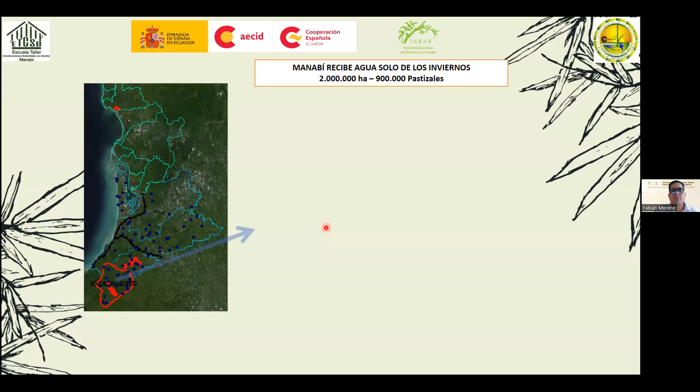People can save up to $320 a year because of self-consumption of bamboo. Here we can see some other pictures, also from Manabí.

They showcase that this is a widely deforested province, the second most deforested province in the country. There's almost 2 million hectares, out of which 900,000 are pastures. So all these dry areas are pastures, and those red spots are the bamboo spots.

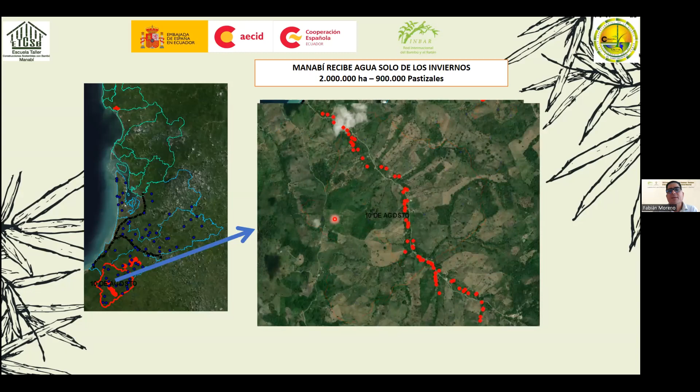So those lines are Guadua, and they protect water sources. If we look at the picture of the higher part of Manabí, we can see that bamboo is located in the highest points, and this is related to the conservancy of water. The majority of the bamboo found in Manabí is present because it helps us keep water.

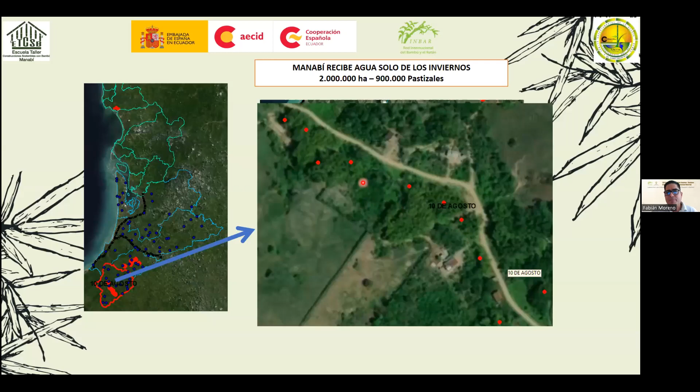Manabí is the only province that doesn't get water from... I think the survival, or water for human consumption, in this province depends on the amount of rainfall and the capacity that our forests may have to conserve water. That's why we see the presence of bamboo.

Whenever we look at the major uses of Manabí bamboo, we have this kind of cane called caña rolliza, and also other kinds of bamboo used for fences and temporary housing. So bamboo in Ecuador has been considered the material used vastly by people with limited resources. This can actually be true — the majority of bamboo in Ecuador is indeed used by people with low income, but this of course does not mean it's a material for the poor.

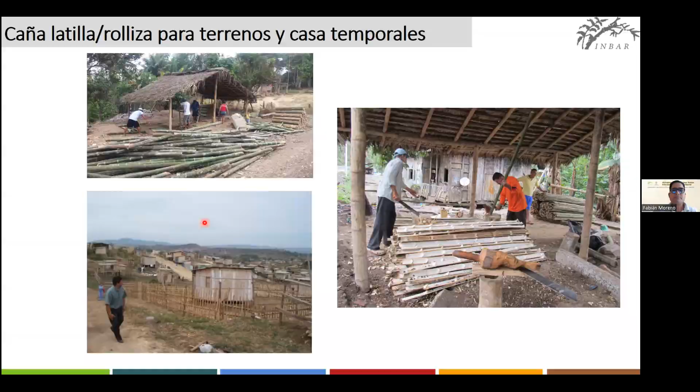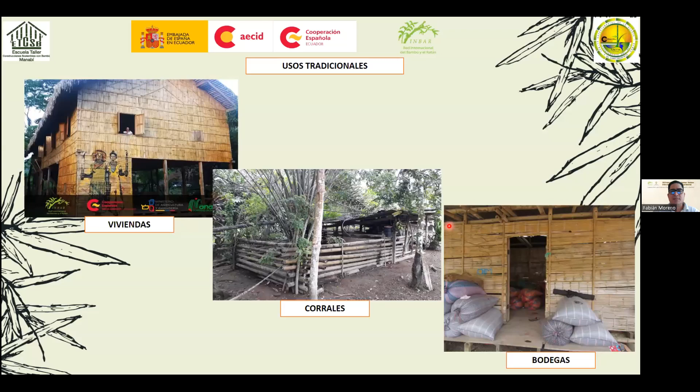This is an area where we've placed a lot of effort in recent years, and ever since the arrival of INBAR like 20 or 30 years ago in Ecuador, we've fought to change this perception about bamboo. Traditionally, it has been used for housing — these houses are over 100 years old. It has also been used in productive structures, widely used in agriculture, and also for the prevention of landslides.

But what's the current status of bamboo plantations in Ecuador? People who have bamboo nearby are people with low income, and they consider bamboo a means for their survival when weather conditions, the effects of climate change, and now the El Niño phenomenon, have a negative impact on their main economic activities like cocoa, coffee, and banana. So the harvest decreases dramatically, and they see in bamboo an option to survive during this difficult time.

Since there's no organized bamboo chain or ongoing demand that would promote the constant use of bamboo or encourage producers to sustainably manage it, they decide to work with informal traders who have no knowledge about the management of bamboo and who just cut it off, while completely destroying the areas where producers plant and harvest bamboo.

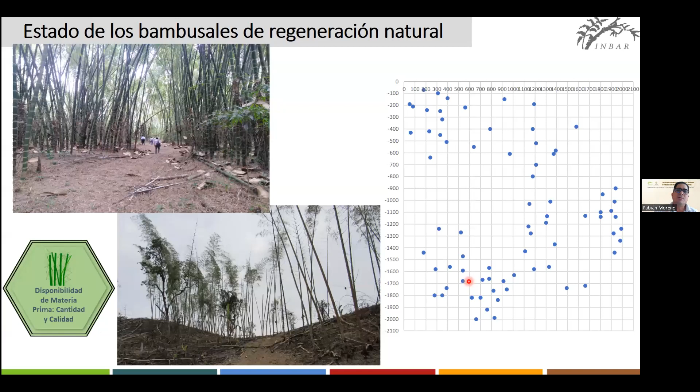This is a picture of the status of Guadua forest in the canton of Portoviejo. This inventory was done with INBAR staff who came from China, in a 30 by 30 parcel. We've realized that the area not used by bamboo could have a different use, and they have very low density because there's very little maintenance given to them.

Since 2018, we started this program called Impulso al Bambú, a strategic resource for local development, done with the chain of sustainable development and sustainable production. In order to create the social impact we were aiming for, and try to break the scheme that states bamboo is only used by the poor, we had to create this project about the availability of raw materials, both in amount and quality, because the poor management of bamboo led to poor quality too.

Also, training of qualified labor and qualified professionals, because we may have proper labor for building, but if there are no building professionals specialized in bamboo, whenever they start working on this project and bring it to the central government, local government, or even private enterprises, they don't do so because they didn't have any knowledge. We needed to work on research, selling, and access to market. So a lot of work had to be done about this. We needed to work with political advocacy, the relationship between stakeholders, and national and local regulations, all in order to create the conditions for a sustainable chain of production of bamboo in Ecuador.

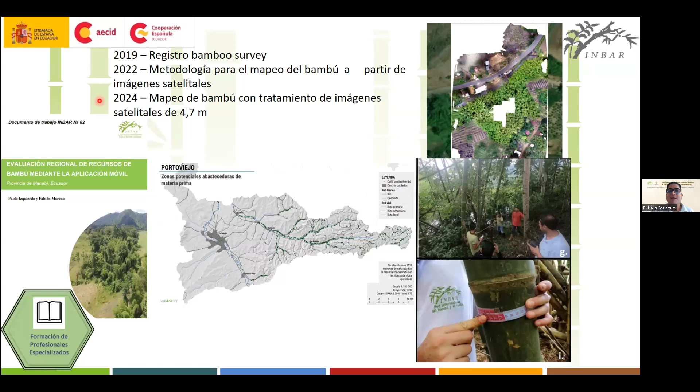Now in 2022, we've run a lot of workshops about geographic information, training public workers and specialists in this subject in order to map this. And in 2024, we're going to start a mapping process with free source imaging of 4.7 meters.

So we worked with the supply side, but there was another issue too, because we needed the preservation centers. The treatment and preservation of bamboo was indeed an issue in Ecuador. So in 2016, after the earthquake, there was a before and an after because of this.

It was clear that bamboo was an earthquake-resistant material that didn't lead to losses of human lives during the earthquake in houses that were built with bamboo. So this was very interesting, and this led to the interest in bamboo.

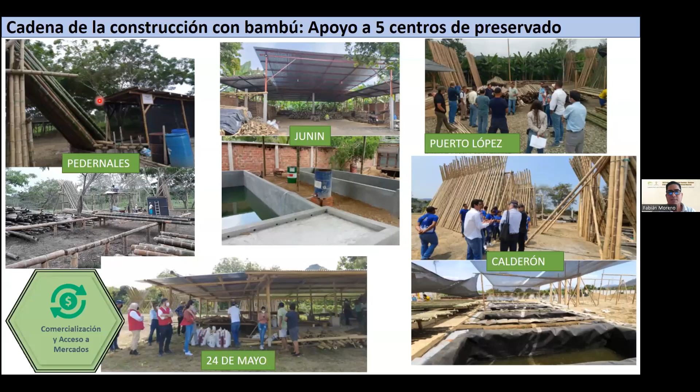However, we didn't have enough preservation centers, and the ones in place were inefficient and didn't have the capacity to preserve as much bamboo as required. So we started providing support to the preservation centers of the province for them to be more efficient, to have greater preservation capacity, and above all, to do so in a technical way as required by the National Construction Standard.

So this screen, this picture, summarizes the events that have taken place in Ecuador. After the 2016 earthquake, the Ecuadorian Standard for Construction was created.

This meant that Ecuador included bamboo as a construction material for the country. And as I said before, the earthquake determined a before and after in Ecuador.

In 2018, the National Bamboo Strategy was published, which for its development included private stakeholders and state stakeholders, in order to put together a document that would set the path forward with bamboo chains in Ecuador.

And in 2018, the first ordinance at a national level was created that promoted bamboo construction and sustainable management of this element, through tax exemptions given to property tax on a yearly basis.

So based on the amount of bamboo in your construction, your property tax would be reduced up to 50% of the total payment. Likewise, property tax on lands, based on the percentage of bamboo found on a given farm that was duly recorded and managed, would also be reduced.

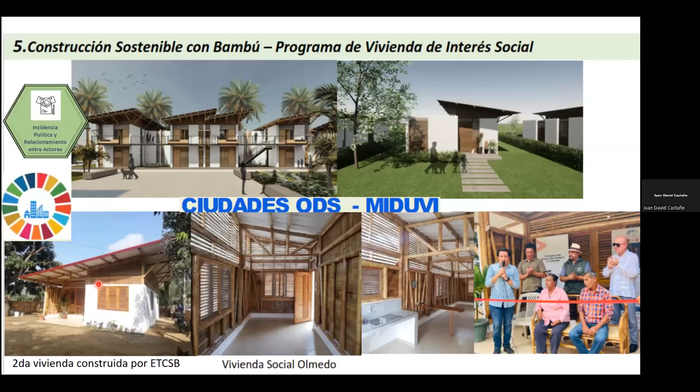So a producer who supplies bamboo for one of their houses will receive directly $500 for their unpreserved bamboo. And this bamboo is taken to preservation centers. In this case, they are made out of families and associations in this province, and they also have a direct cost. So in order to do this, we needed to train a specialized labor.

So this is where we came up with the need of creating the School for Sustainable Construction with Bamboo, which took place with the support of the central government of Ecuador, as well as local governments and private enterprises, but also the academia, other associations, and of course the presence of INBAR.

And the mission is promoting ongoing training through an innovative, technical, inclusive, and comprehensive process of non-formal training, by being able to certify local labor for sustainable bamboo construction as a strategy for labor insertion and for the creation of income for the youth in conditions of poverty because they haven't been able to access education.

Remember that I said that the rural zones of the province had an average age of 40 years of age? That's because there's no jobs in this area.

So this school works in a specific way, and it's located in a given canton once per year, and it's placed in strategic places so that these people in Manabi, families that own bamboo, would be able to access this training that lasts for a year and that is certified by the Ministry of Labor.

That would lead to jobs. And this has created an impressive impact because the producer, who is the son of another producer, is not only looking after their small piece of bamboo, but they're already looking after theirs and their family because they're going to provide them with the raw material for the construction.

This methodology is 30% theoretical and 70% practical. Very little is taught in a classroom, and during workshops, they learn how to familiarize with tools and perfect their techniques.

There are field visits for them to build their own criterion, and this is very important because once they learn this technique, once they learn the theory, once they learn how to interpret the construction standards, they work in real places, and we call them the sustainable footprints of bamboo.

So far, during the first processes, 102 teachers have graduated, and we are about to finish the second cycle of the school. The first one was in the Portoviejo sector, the second one in the El Carmen sector, that is about to conclude, and we expect the graduation of 85 new teachers.

The first one was in the center of the province, the second one is in the north of this province, and we're going to start the third cycle in February, and this is going to be to the southeast of the province. This is important.

It's important to highlight that 24% of participants in the workshop school are women, and they are very, very active. They are treated in the same conditions as men, of course. And this is a very high number, even though it doesn't seem so, because construction activities have always been done in Latin America by men.

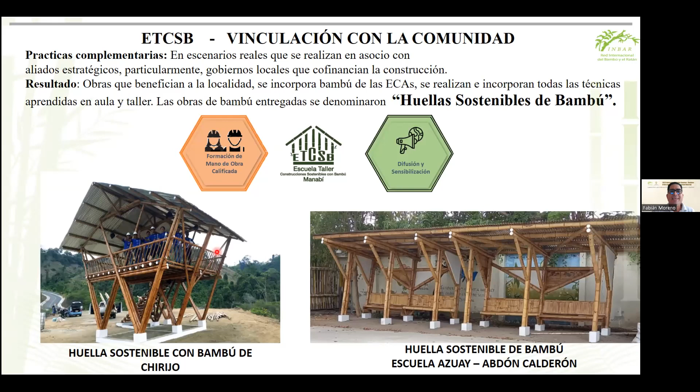All right. So how can we link all these processes that include raw materials, construction, regulation, ordinances, and how we promote them, how we raise awareness through these sustainable footprints of bamboo? These are structures built in association with local governments, and this is the place where these practices take place, where students are able to carry out real practice.

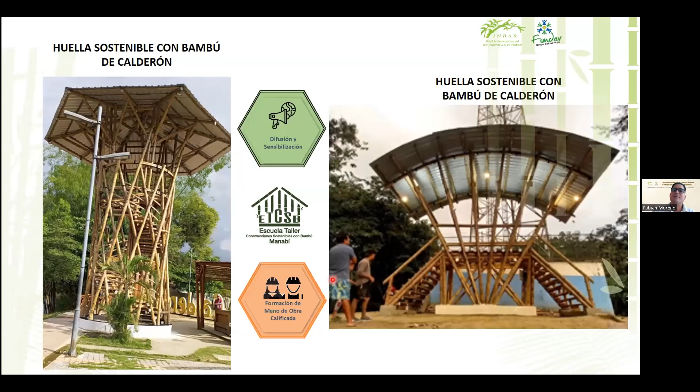So this workshop provides a design which is made by students through models and labor, and local government associations, the prefecture, and even the state itself provide materials.

And this is how, wherever we found a school, we promote the work of our students.

And because of this, because of the first cycle, the students were able to create an association, to create a group, and create their own small business for the state.

And as I mentioned, 1,080 houses were built in the first set of social housing built by this initiative.

This brings pride to the construction sector, and the processes carried out by INBAR and ESI, as well as the students who have graduated from the processes, built 480 housing kits. Almost 50% of all houses built during this first set were built by the former students of the workshop school.

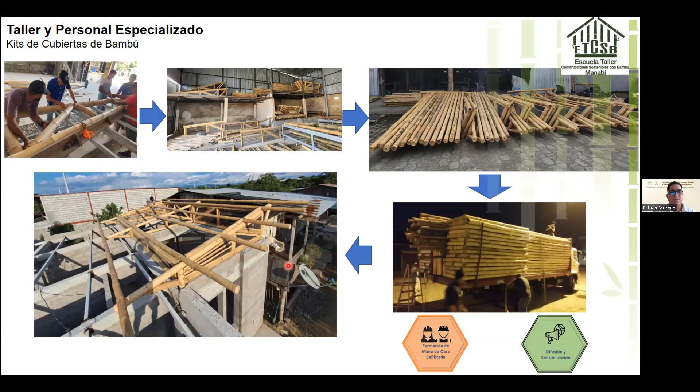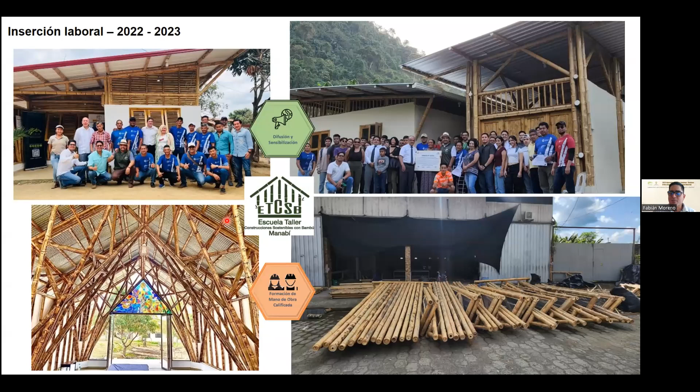So we built Chirijo houses, we built the Olmedo house, we built a church in Coquimillas. There's one that I forgot, which is the Coliseum of Puerto Lopez.

So the conclusion is that the activities that seek social impact should be clearly associated to local needs.

Saying this from an office in a different city, in a different province, has proven with time there's no fruit. So it's important to carry out actions with the commitment of local and national associations. This is a political decision, and for this we need continuous lobbying at local government and the central government too.

This leads to a multiplying effect in public workers in their own careers, because as there's instability, or as the leaders of the government change, we lose the continuity of the actions. When you have public workers that have a career, there's continuity in actions even where there are changes of government.

Other activities for promoting fair trade as a mechanism that will lead to income for producers. They are the ones who have resources, and they are the ones who provide bamboo to this chain. Field schools are a methodology that can be replicated for state constructions, such as the Ministry of Agriculture.

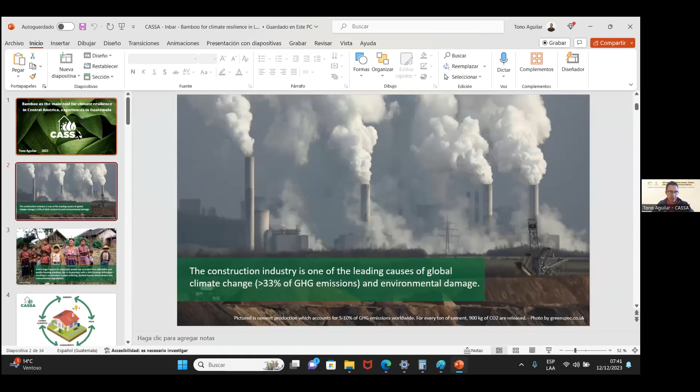Can you still see my screen? Yes. Great, thank you, sorry about that. So I wanted to talk to you today about bamboo as the main tool for climate resilience in Central America and the experiences we've had in Guatemala.

CASSA is a private social company that was started in 2013 with the aim of solving two main problems. As you may know, the construction industry is one of the leading causes of global climate change, with over a third of greenhouse gas emissions, mostly from the production of cement and steel. Construction in general causes a lot of environmental damage.

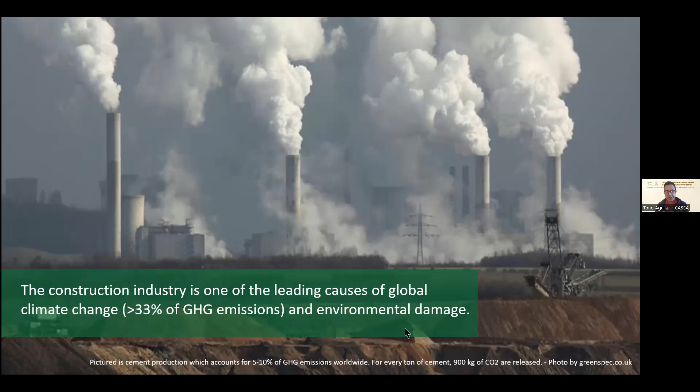The second big problem is that a very large fraction of very vulnerable people are excluded from affordable and quality housing solutions. Like in Guatemala, where we have a housing deficit of 54%, which results in unnecessary human suffering, stunted human development, and environmental degradation.

People that are excluded from proper housing chop the forest a lot to get firewood to cook. They degrade waterways, and in general they are caught in a vicious cycle of poverty that also creates more environmental damage. So we started CASSA to try to help both of these problems with a holistic housing model.

The model tackled four different axes. All our houses were designed from the beginning to provide solar energy from solar panels, water from rainwater catchments, sanitation by separating, upcycling, and treating all the wastewater, and to also help combat climate change by using natural building materials. That was the concept from the very beginning.

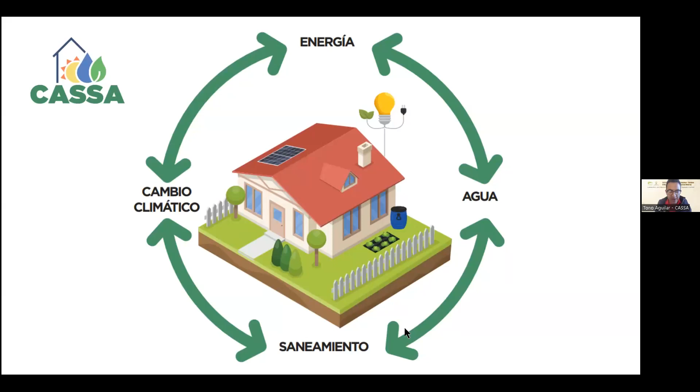So when we started CASSA, it was nice to get our first clients. We are a completely private enterprise and we were a startup. So we were really happy to get our first client, who was a Quiche Mayan in Guatemala, to buy this first house. This is a completely bamboo house, as you've probably seen many in the past.

It's a bamboo structure completely that's stuccoed over. The stucco is a mix of cement and lime, and that's put over these bamboo mats. You see completely bamboo structure. So we directly stucco the bamboo mats with the mix of cement and lime. The lime makes it stick really well to the bamboo mats.

You can see the solar panel here up top of the roof. There are canals at the bottom of the roof that redirect the rainwater towards a cistern, and they have a water pump that helps them use the water throughout the year. The gray water, from faucets and showers, goes into a garden. So when you're washing your hands, you're also watering your plants. This was something very simple, very powerful, and it's rarely done in Guatemala.

95% of our rivers are polluted because most of the sewage just goes untreated into rivers. So this was a very simple and impactful thing that we decided to do as a standard in all of our houses, and it's been very appreciated.

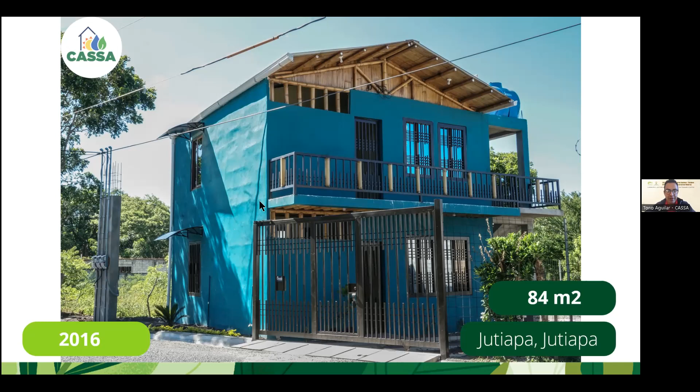This is something we also learned to do ourselves as a company. There weren't any other companies in Guatemala doing this. When people asked us, can you build a two-story house made from bamboo, we would say yes, because we needed to keep learning, keep growing, and keep the company operating. It was very gratifying to learn hand by hand with our workers. There were some specialized workers in Guatemala before; we continue to nurture them. They're still on our team, still valued members of our CASSA family, and we keep training more people as the demand arises.

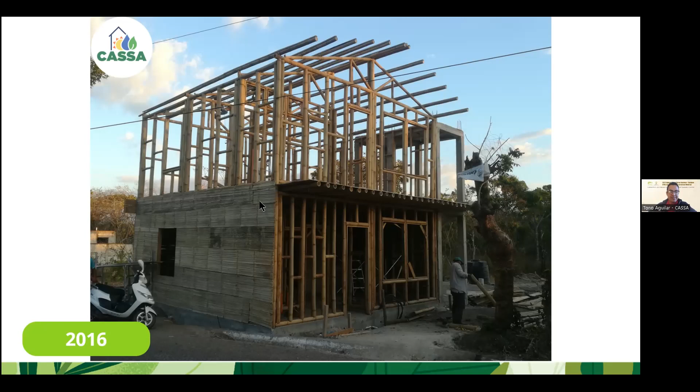So this is 2016. From the very beginning, right when the SDGs came out, we realized we really needed to track our impact. Impact is the root and nucleus of what we want to do at CASSA. Our purpose is not just to make money - that's our third purpose. We're a company, so we need to make money, but our main purpose is to make a positive impact in the world. Through our houses, we realized we impacted very directly these 4 SDGs.

Number 6, clean water and sanitation. Number 7, renewable energy. Number 11, sustainable cities and communities. And number 13, climate action. I'll show you later because we take very detailed statistics of each house we build, and the impact of each house is quite large because a house lasts for a long time. This is important to us, and I think it's important for anyone working with bamboo. Bamboo can help many SDGs, and right now I'm still selling short some of the other ones we've impacted, like what you saw in the previous presentation here in Ecuador through work with bamboo. So it's important to use this as a framework.

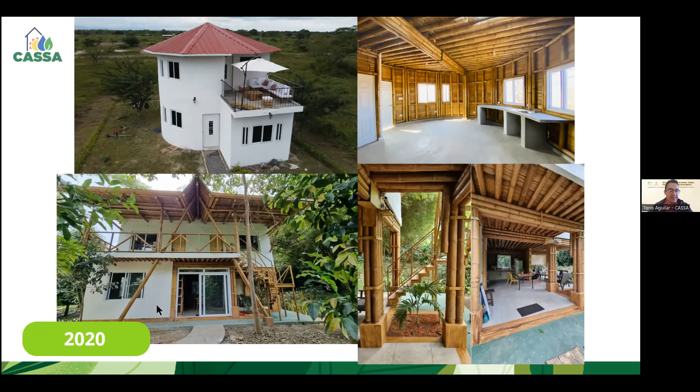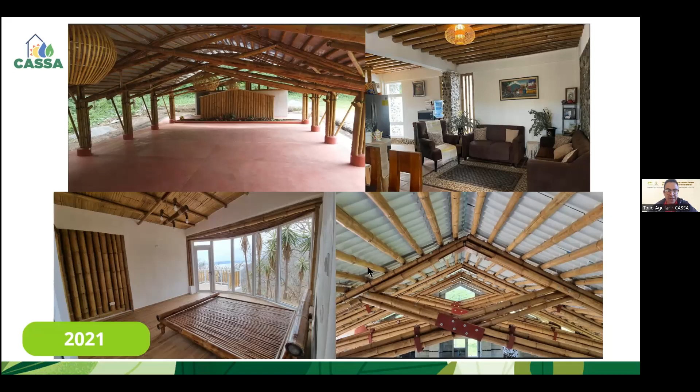The middle class has been asking us for slightly bigger houses. We've also built community halls for communities that are really remote, like in plantations where the owner asks us to benefit their community. We've done several houses in the city, smaller houses of about 25 square meters but with slightly better finishings, and we've even done some churches. In general, we've diversified our product offering a lot, demonstrating that bamboo can really meet all construction needs.

So we've seen an evolution from the very first social house all the way to commercial projects in a little over 8 years, definitely an evolution in the private sector. But I want to get back to a project we've done recently that we really care about. Before that, I want to show you quickly—we've built 110 projects, and here are some stats.

We've installed capacity for 14 million gallons of clean water, because all our houses have 5,000 liter cisterns that last for 40 years, so the impact over time is significant. We've also installed close to 2 million kilowatt hours of clean energy through all the solar panels we've installed, and captured nearly 4,600 tons of CO2. So the impact of a single house is substantial, because a house lasts for a long time.

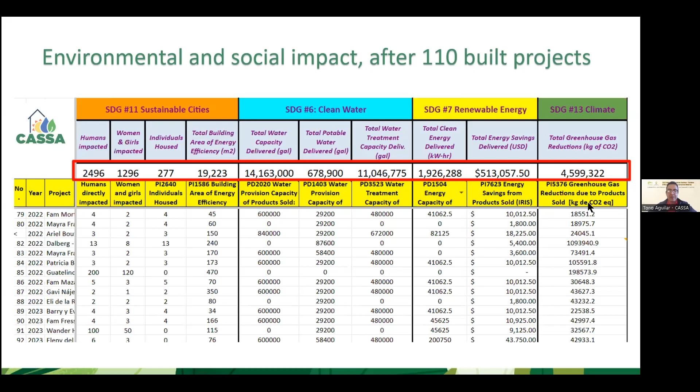Now going back to this project in 2022, backtracking a little, Punta Brava again—we're in this Caribbean village. In 2020, Punta Brava was flooded by hurricanes Eta and Iota. The whole village was completely submerged with water, many homes were destroyed, and people lost their belongings. We really thought, how can we help Punta Brava avoid this situation?

So we applied to this program called the Climate Smart Forest Economy Program, run by Dalberg, the World Economic Forum, and other organizations, and they gave us funding for this pilot. What we proposed was to grow more bamboo in Punta Brava, and also teach them how to build their own houses. We designed this house to be very simple to cut, to use with very simple tools, and we built it with them so that when the next hurricane comes, they have the material, they have the know-how, and they don't need to spend a lot of time waiting for resources or donations.

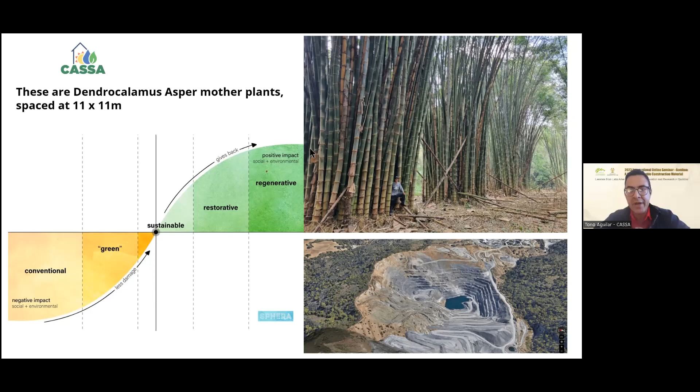In this chart, we see that we really need to go way past sustainable. Sustainable is just maintaining the status quo now. We need to go back to restorative and regenerative practices where our impact is actually net positive, net climate positive, net nature positive, whatever term you want to use. Growing bamboo is one of the best things you can do, especially when it's linked to communities, and when the communities are the owners, the caretakers, and the beneficiaries.

In 2022, Punta Brava, after we had built the houses, it flooded again. These events used to happen every 20 years; now they're happening every 2 years. So we're seeing the effects of climate change already. This is an existential risk for Punta Brava.

It helped again change the minds of people, showing that bamboo is not just for an iconic schoolhouse, it's also for my own house. It's accessible to me, and we can all do it together. So we've been very happy to see that change.

We continue to try to help Punta Brava and other communities because bamboo is what really allows you to elevate the house, and this is what's going to give Punta Brava the most climate resilience. There's no other species. Nothing else grows fast enough, nothing else has this long lifespan, physical span, and structural properties. Bamboo really stands on its own as the best climate resilience tool for these communities.

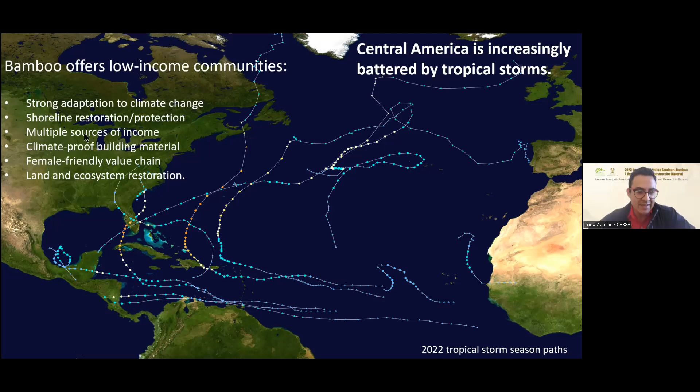So what bamboo offers these communities is strong adaptation to climate change, shoreline restoration and protection, multiple sources of income, a climate-proof building material, a female-friendly value chain, and land and ecosystem restoration. It's hard to really find a plant that offers more benefits, not just for climate resilience, but for all aspects of life, because of its strong growth and incredible versatility. That's something all these communities have in common, that they could benefit from.

At CASSA, we're trying to help a lot of these communities kickstart their new agroforestry plantations. By agroforestry, we mean we've already designed, as part of the program we did in Punta Brava, using a lot of INBAR's documentation for what species combine well with bamboo from year one to year two to year three, so that you don't have a monoculture plantation. You can have several species intertwined with bamboo. We're trying to help new plantations start up in communities by helping them certify and register new plantations.

From a satellite, you can take pictures and demonstrate that you're capturing carbon. We're going to follow all the core carbon principles from regulatory bodies to make sure this is as transparent as possible, and help them get sponsorship and capital from companies that need to offset their emissions, so these companies pay communities to restore land. I think this is one of the biggest opportunities in the coming 10 years. We need to restore degraded land, which is often community land, and these communities need to benefit from that process. So we're helping them start those pilots.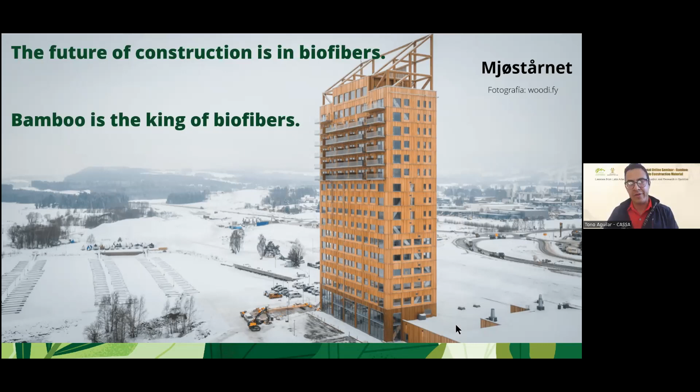This is a building in Norway built completely out of wood. This is pressed wood that's glued and laminated in a factory, and it's engineered. You take fibers from a biomass and press them together. Bamboo is the fastest growing structural fiber on earth, and we're just starting to discover it. This is still something new in Europe and the US, less than 20 years old, younger than Facebook. It started with pine and Douglas fir, two tree species, and it's only starting to be thought about with bamboo for massive structures like this.

So what's going to happen when we actually start to do this on a large scale? We're going to need tens of millions of hectares of bamboo all over the global South. We need to start growing that quickly, now, everywhere, as much as we can, in South America, Central America, Africa, India, Southeast Asia. I think it's going to be a wonderful thing to experience and be a part of.

And we need to participate actively as much as we can from now. This is another picture of something that is already happening with bamboo. This is a picture from Bamcore. They're in the United States. As some of you may know, Antonio...

One minute? Five minutes? Okay, thank you. So this is a picture from Bamcore in the United States.

Some of you may know the United States builds most of their houses with wood, so that's already a wood-based marketplace. There's no issue of cultural adaptation. These wooden houses then get covered with another material called siding, and they get covered on the inside and painted. So people don't even bother to think about what their houses are made of anymore. They're all made of different sorts of fibers.

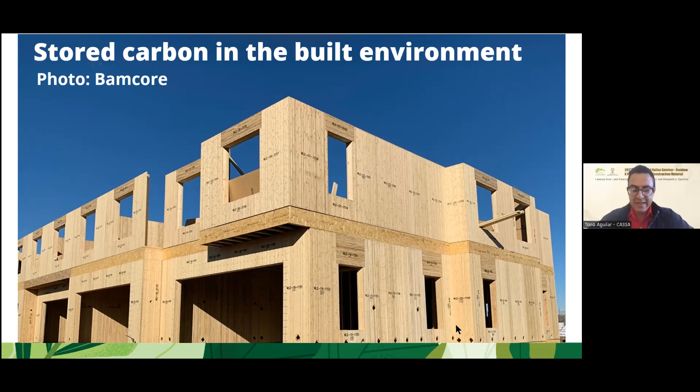So I'm going to close with that. That's why I wanted to reiterate that I firmly believe bamboo is the main tool to help combat climate change in Central America. Thank you so much for listening, and let's grow that future together.

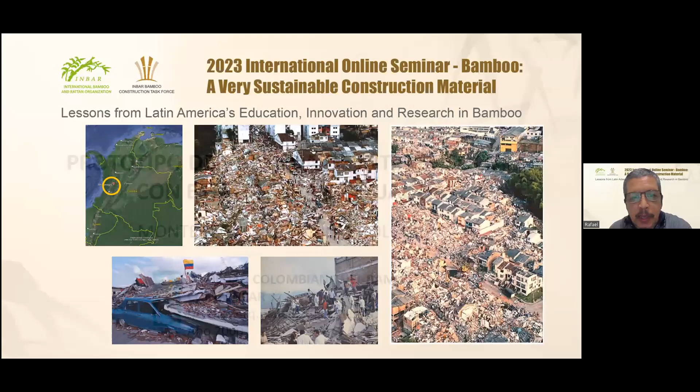So the prototype was promoted, just like many others — I don't know how many there were. 23 years have gone by. There were 3 prototypes, and 2 houses were built with this prototype. They were promoted by the Colombian Bamboo Society, which wanted to promote these prototypes and find financing. This was done through a family compensation fund, these being entities in Colombia — this one is called Compensar — and the design was made by me.

So 2 families were chosen, and what was particular about this is that they were female-led — women heads of households that were affected by the 1999 earthquake.

We offered the prototypes, which at that moment were considered basically the window for this opportunity, meant for reconstruction. The coffee belt, particularly in Quindío, Armenia and neighboring areas, had different strategies to offer families prototypes or housing solutions that could be chosen, with the government financing the majority through a subsidy for reconstruction.

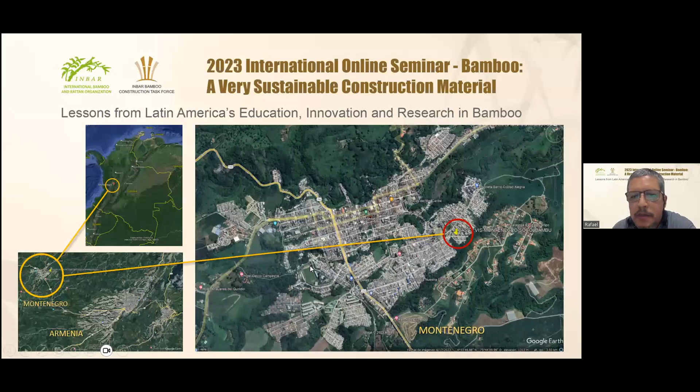So it was difficult to find labor and material. There was no process in this case where a proper knowledge transfer could take place from a technical point of view, as in the past there had been some workshops where the good practices were mentioned regarding this material, and also labor from the region and from the municipality of Montenegro. So in this case, the guadua had the same effect.

Now, this development, we wanted to do since the beginning because we realized there was a hurry, there was a need and urgency for the creation of solutions that were material focused, but they were not focused on different aspects that would broaden this, that were related to the importance of the material and that would provide real answers to this versus the technical requirements that were needed for these houses.

So, as we were saying before, our interest was not to solve everything with guadua. There were a lot of examples at the moment about this.

Because we were attempting to put forth some economic proposals. And as this material is present throughout and can be found in many places, basically it was given out and everyone would be building fences and warehouses and other things out of guadua. Of course, they use this for livestock and agriculture.

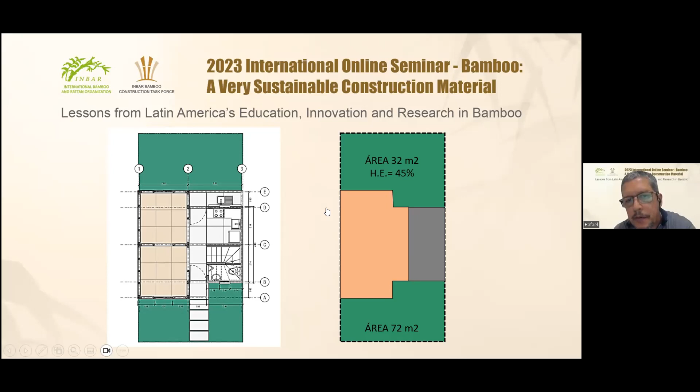So this house is built in 2 stories, with the social spaces on the first floor and the bedrooms on the second floor. And we can see the development of what the structure made out of guadua is going to be like. This is used as an arm for circulation, and the corridor is the area that brings these two structures together.

And we can see how this is made with bricks and also with guadua. In addition, we considered different aspects related to cross-ventilation. So this was a very simple design.

And at some point, we wanted to react to how this is built and try to move past certain aspects that, as I mentioned, were considering the past, but would only be solved with guadua. That was the technical part. We wanted to see how this material interacts with the environment, how it worked together with other materials, and how it would respond to the conditions of the people who would live in this house.

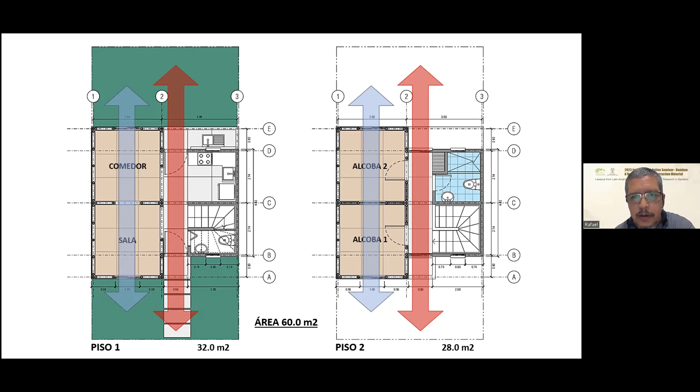What the structure in this moment consisted of was a distribution where the central third proposed would have to be open elements. They could be windows, they could be doors, and this is how this was created, in such a way where the corners were configured vertically and horizontally in a triangular way. So there was a vertical part of the wall and also the horizontal part of the wall. So there were some diagonal elements that created some prisms, and this would contribute to the stiffness of the modules.

So we wanted this, you have 5 more minutes, that could be reflected in such a way, and that could also be successfully replicated.

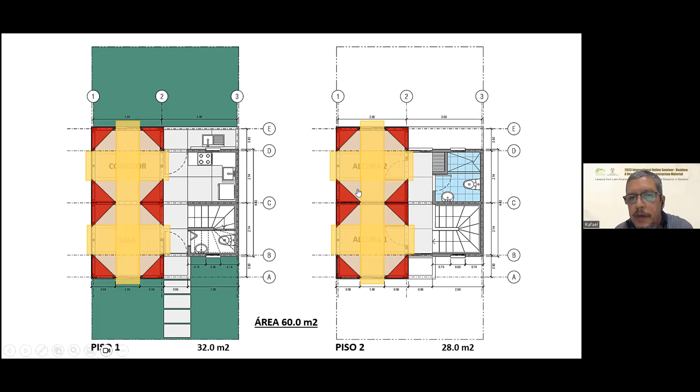We wanted to go away from the artisanal way of building because we believed that this was not enough for this construction. We wanted a different perspective where we could replicate this, or make it in such a way that this could be more important, allowing us to create different kinds of responses.

This, of course, lined with mortar, with cement, with sand, and with water. It is worth mentioning that we did not want to apply bahareque directly at that moment, which was being accepted from a regulation perspective. In addition, we wanted the structure itself, the guadua structure, to provide enough to have a proper behavior. So this lining could have different characteristics and different materials.

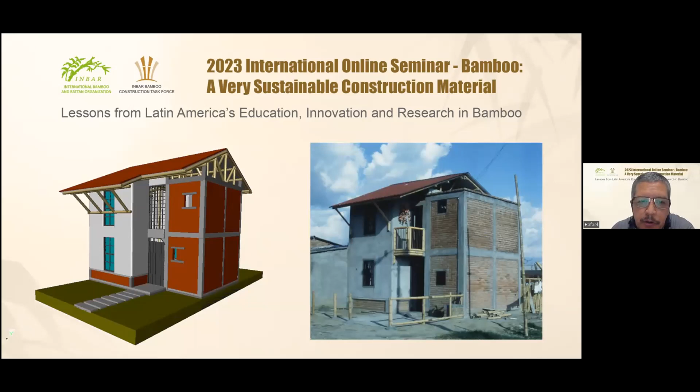Even though we couldn't couple them together, we were able to see this result in some of them, and this included certain construction elements where we can see the use of brick, and we can see this guadua structure. This guadua structure was anchored through this, with a light lining made with steel. We call this thermoacoustic lining here. And labor, in this case, was not very industrialized.

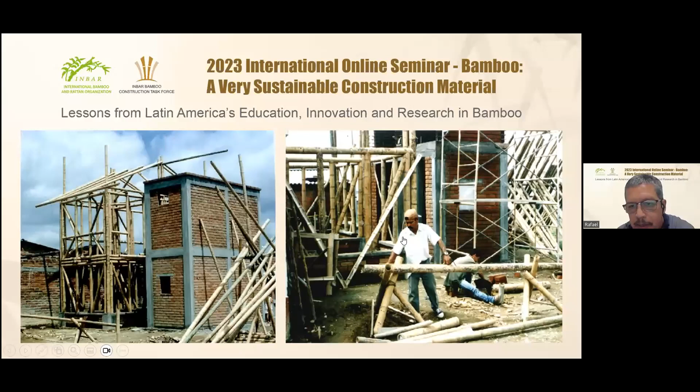So there were some processes in which we tried to create a sequence and be coherent between the construction and being able to replicate this with solutions that would be created based on a standard, having a homogeneous response from a technical perspective, of course.

So these houses were around $7,500. That was about 15 million pesos at that moment.

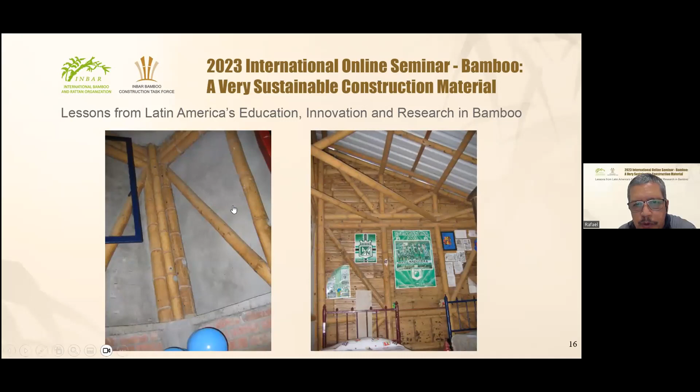And as we said, this is the material that we use. This is the evolution of the inside of the house, and there are some diagonal beams.